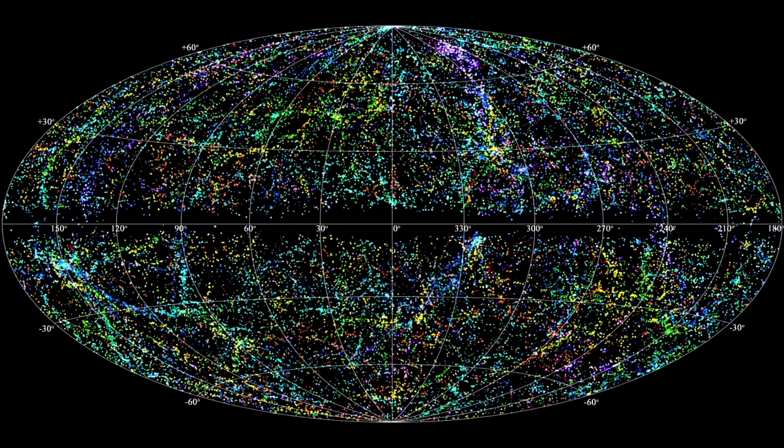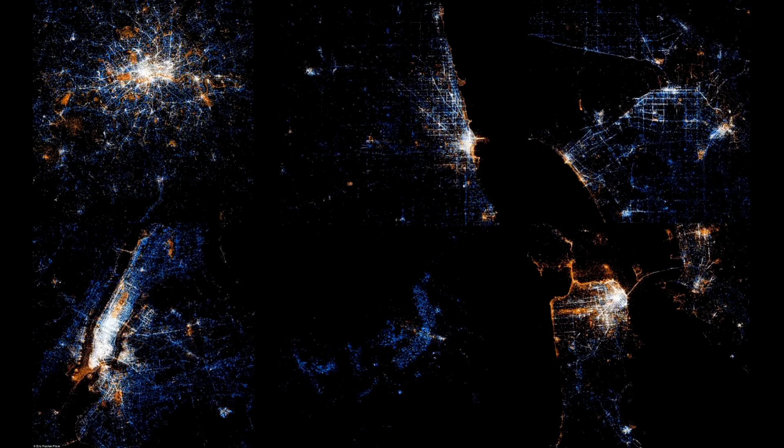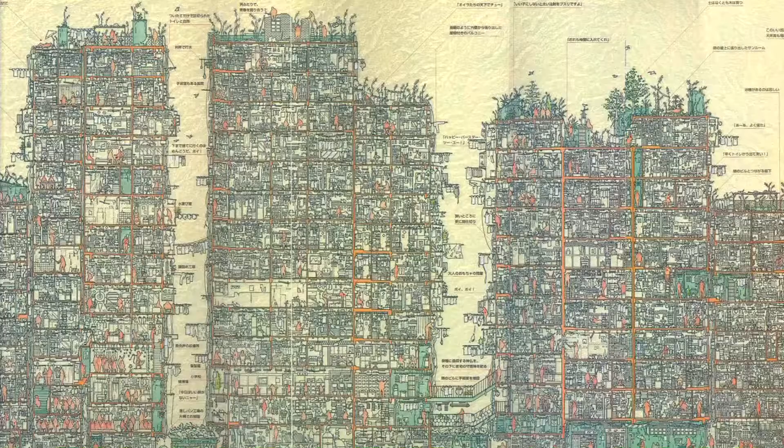And as I said, I believe very much in density intensification. This is an image of Kowloon Walled City, the most dense environment ever created by humankind. Most of us don't live at that kind of density. The 7 billion of us live in quite a scattered array across the planet in terms of how we use land. And in my book, I talk about the fact that if all 7 billion of us lived not at skyscraper density, but actually only about 3 or 4 story brownstone density, about 75 units to the hectare, all 7 billion of us could fit in the state of Texas in the United States.

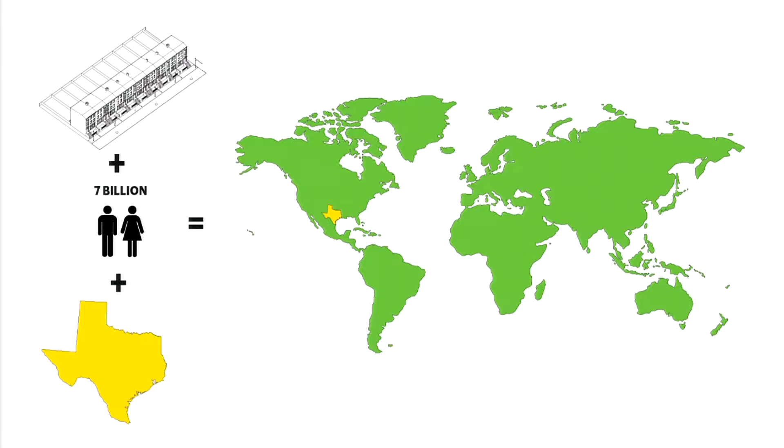Now, I'm stating that not to suggest that we all move to Texas and that we leave the rest of the world for agriculture and nature, but to actually say that how we live in terms of density, I think, will actually dictate the future of the world. And if we can live in a more dense way, we will certainly lower our carbon impact and create a better planet. But what I found in talking to people about that is that density or intensification, depending on how you talk about it, has a namelessness and a facelessness that scares people.

And as architects, we spent much of the 20th century struggling and debating over issues of style, became lost in that world, and really, I think, lost our way in terms of understanding the true beauty, and I will use this very dangerous word beauty, to talk about how beauty could actually, in the 21st and 22nd century, be a way in which people can embrace the complexity of the world, not deny it, not be reductive about it, but actually find a lens into it.

And I feel that in order to do that, we no longer need Superman. It is not about the architect as superhero, but in fact we need the Avengers. We need an extraordinary group of skills, men, women, people of all different orientations and races and skills, to try to give us that beauty, to give us that lens into the complexity. And in fact, it may not be about 4 or 5 Avengers, but an entire world of different skill sets where it's not just about architects and engineers and bureaucrats, but the biologist and the chef and the poet.

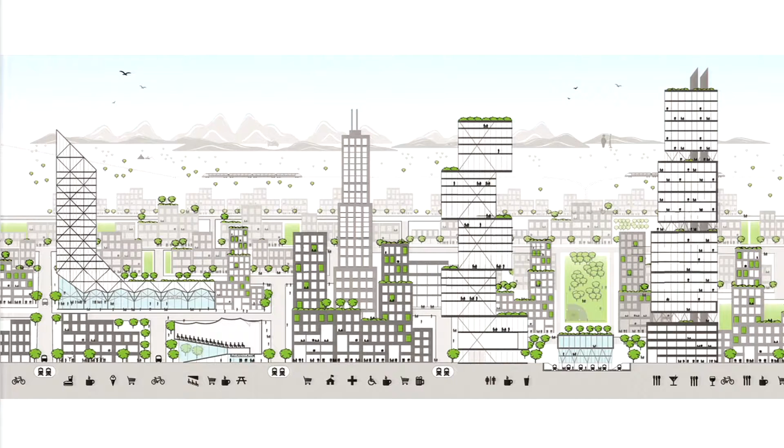And these are images from our studio, and this is very much what we try to build, where not everyone is an architect and people come from very, very diverse backgrounds and mindsets, all towards this idea of building a better city, of building a city that's inclusive, that's green, that's dense, that's transit-based, that's culturally based.

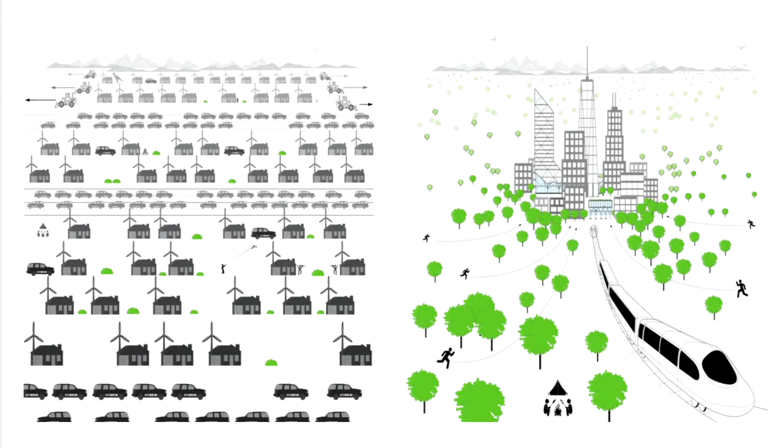So I believe from this you can extrapolate lessons. Lessons that we should not live out in this horizontal sprawl and try to use technology and windmills and solar panels to try to fix that very 20th century model on the left, but in fact use our cities to not only build densely, but to leave nature natural, to be able to access nature in a much more direct way directly outside of our cities, connected largely by train.

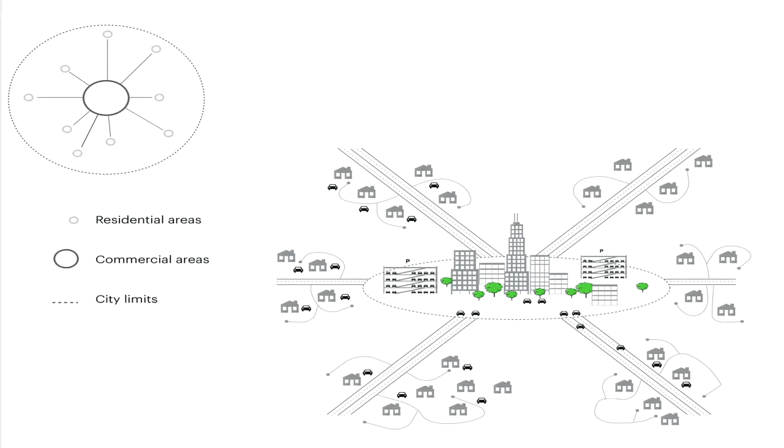At the same time, we understand that the hub and spoke model of our cities is actually changing. This idea that people live outside of our cities and commute into a central business district every day. This is changing very rapidly, and you saw it in all of the images that Dr. Ichikawa showed about all of these various cities, that we are moving into, especially because of technology, a networked city model, where throughout a big city, you can find an archipelago, a series of islands of places where people live, work, and play across many districts, and I think this is reflective of what London has been doing in terms of Eastern London.

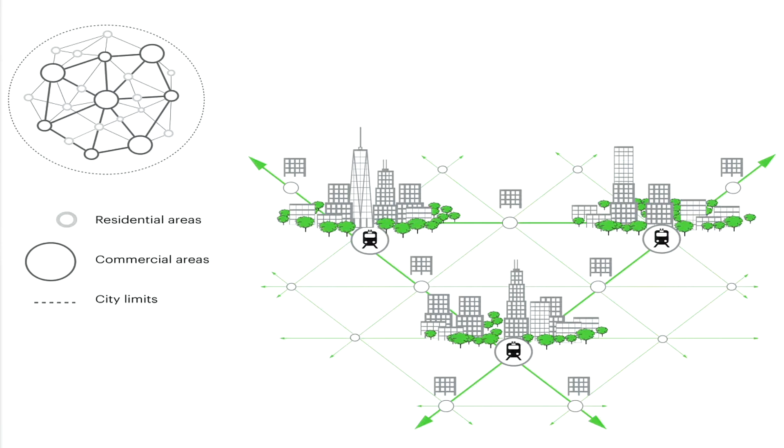So in New York, we have tried to build the Hudson Yards area. This is an extension of the existing subway line, the expansion of the High Line Park, which just opened 2 weeks ago into its third phase into Hudson Yards. This is under construction. This is some 4 million square meters of new city that's being developed as a mixed-use place built around a series of parks by the west side of Manhattan.

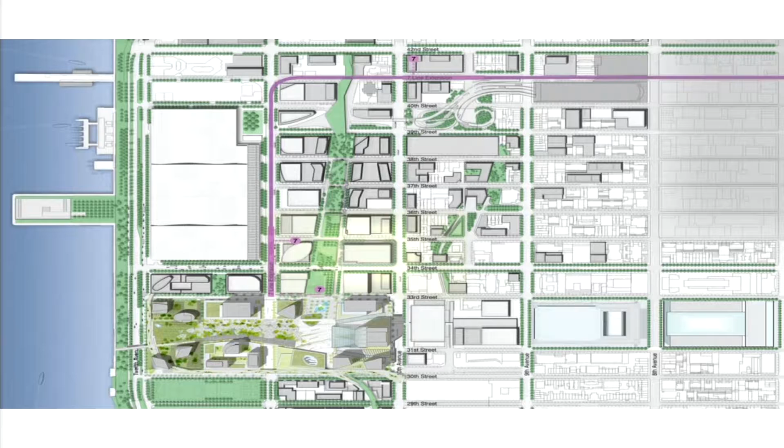But what you understand is as you try to build cities of that complexity, of that size, and with those kinds of ambitions, that the bureaucracy can be overwhelming, and that one needs, again, that interdisciplinary approach to deal with what is a very complex regulatory structure that every single city has today.

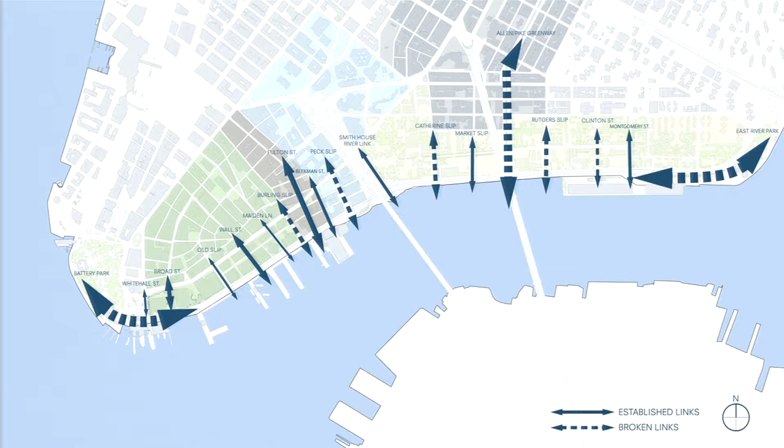We, in many ways, started this kind of work in Lower Manhattan after the events of 9/11. Where we had to rediscover our waterfront as a means of bringing more amenity to Lower Manhattan in the aftermath of the tragedy of 9/11. And much of this was discontinuous. It was hard to access. There was a highway between where one needed to get from the city out to the water.

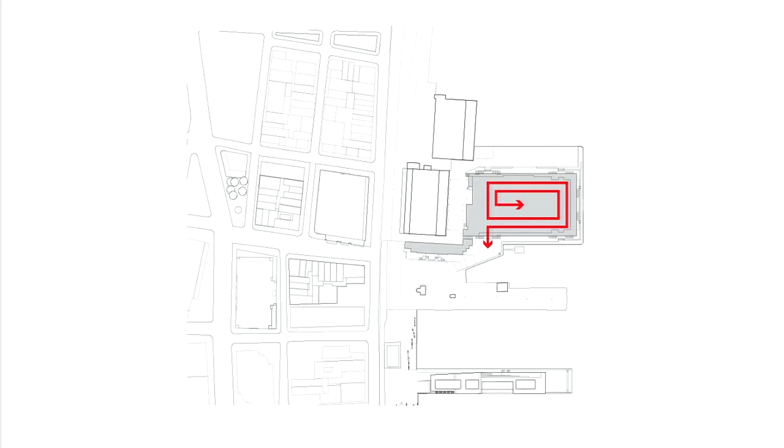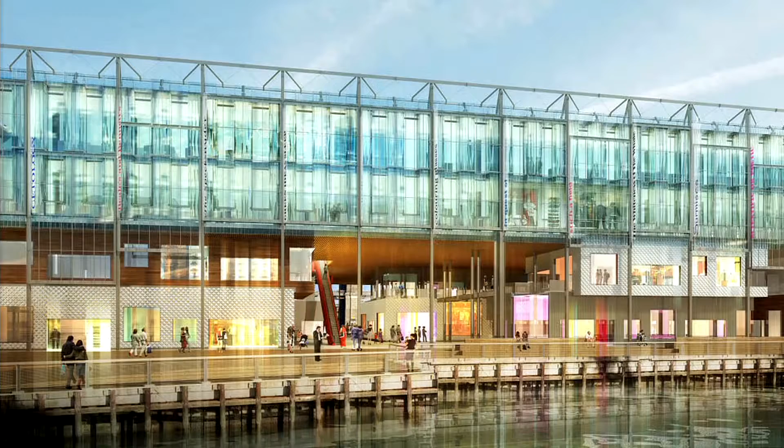And then these are these images quickly of the waterfront that we built along Lower Manhattan, including a new pier that's really quite beautiful, very public, not very large in size, fairly low budget, with public space at both levels. And then next to it, an old shopping mall that's also changing and moving away from the old internal idea of shopping where everyone is trapped kind of in a place, and instead breaking it down and again using this beautiful glass shutter system to open up during nice weather. And always opening and embracing the complexity of the city, not trying to enclose and control the city.

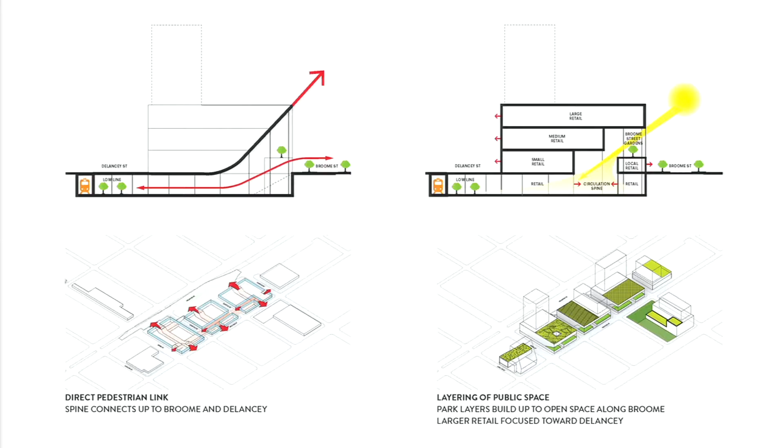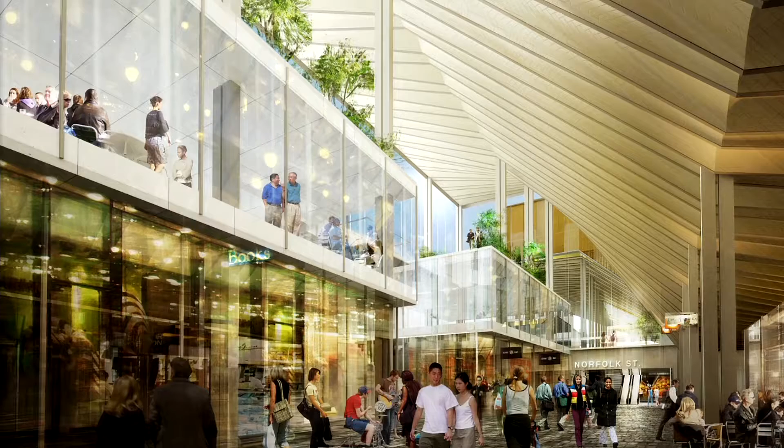This is Essex Crossing or Seward Park, which Professor Ichikawa mentioned, a large housing project including much social housing, a senior housing project connected to the subway. And this is an initial sketch that again talks about how do we bring a set of complexities into the section of the city, also how do we bring light and air into the city and down into the subway and this new market. So this is work for the city in terms of that big light scoop, bringing light down into the subway level with new food and retail experiences there.

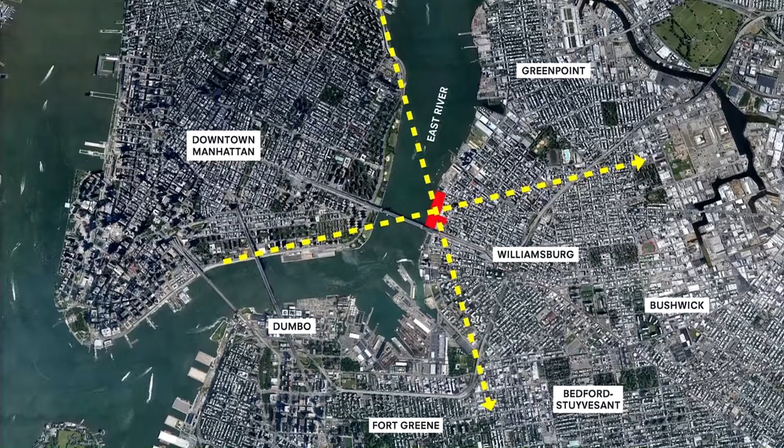Or across the river, the Domino Project. I was very interested in what Professor Ichikawa showed in terms of the 5 kilometers and the 10 kilometers. We're really rediscovering the area in that 10-kilometer belt outside of Manhattan. And this is part of a new waterfront for Brooklyn. This was the previously approved plan for this. This is 3 million square feet or 300,000 square meters of new development, all centered on a heritage building, an old factory called the Domino Sugar Plant.

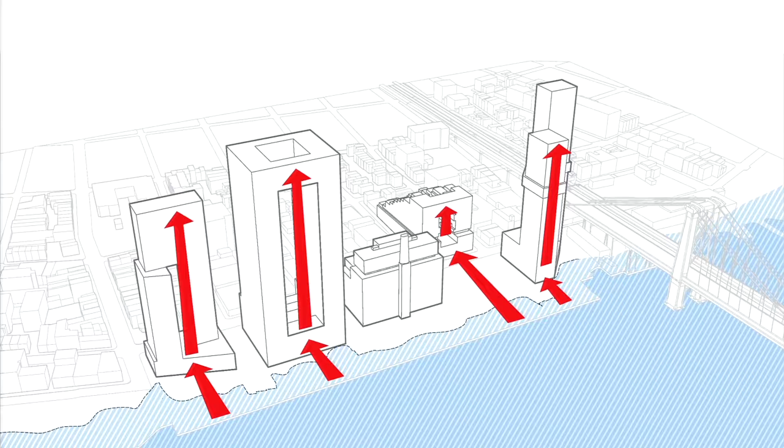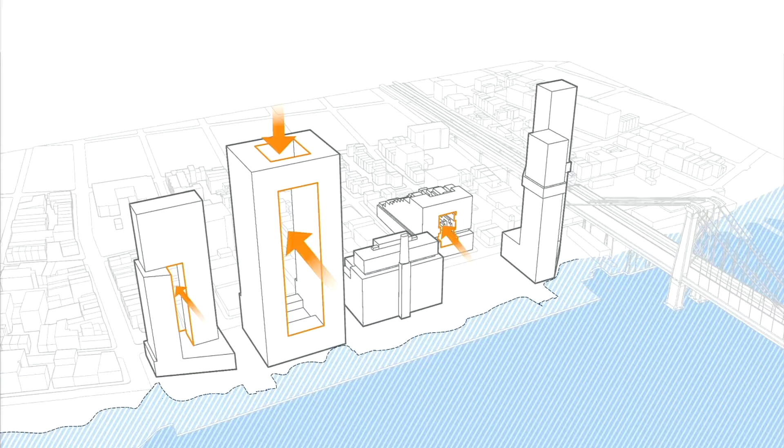And we actually proposed to the city that the buildings go higher to get them out of the floodplain, and also to build about 6.6 acres of new parkland along the waterfront, and also to aerate the building. So every building in the master plan has an aperture in it to bring light and air. It's not to end the axis at La Défense or to make a big iconic statement like CCTV, but in fact a very performative function of bringing light and air back to the neighborhood.

And we tried very carefully to move and interpret the complexity of the city in terms of the lower scale of this neighborhood, the kind of scale of the bridge and the factory, and then the scale of the skyline. And so this master plan was approved with taller buildings, but again, a quite glorious park, and the factory in the middle. And what's important about this is not just housing. This is housing and office space, independent retailers, a school, a community center. It's really about building neighborhood.

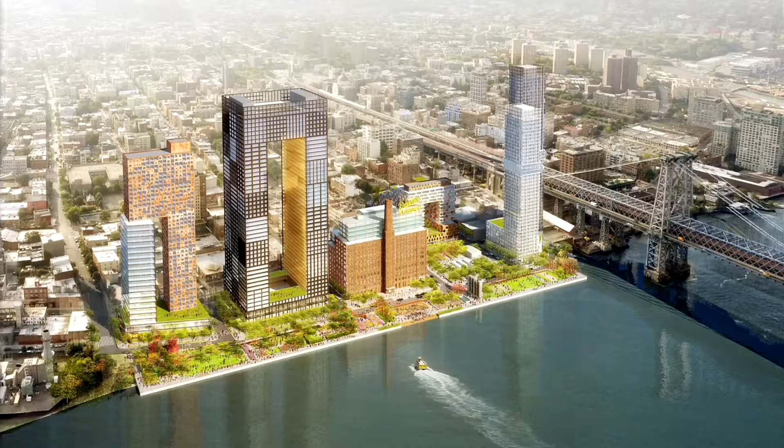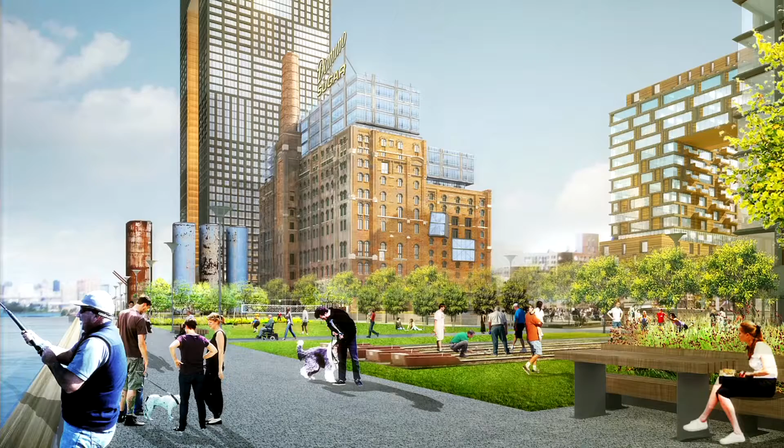And how these buildings meet the street is critically important in terms of building that neighborhood, with a very heavy emphasis on bicycling and walking. So it's not even about using the subway to reach Manhattan, but again, kind of its own node within the larger network of the city, and a way of identifying the place using the old industrial artifacts. And this, again, will be a technology hub.

We at Columbia did a study that said that 85% of our new technology jobs are in heritage buildings, are in pre-war buildings, because those people don't actually want to be in tall towers. They want to be in a different kind of work environment. And so this is something we're very much trying to build in New York. And we're also trying to emphasize a new skyline in Brooklyn. Brooklyn is sort of the next chapter in New York's history, if you will.

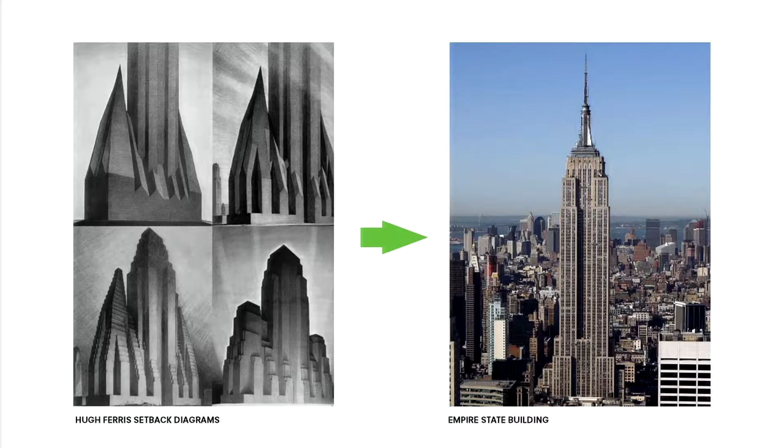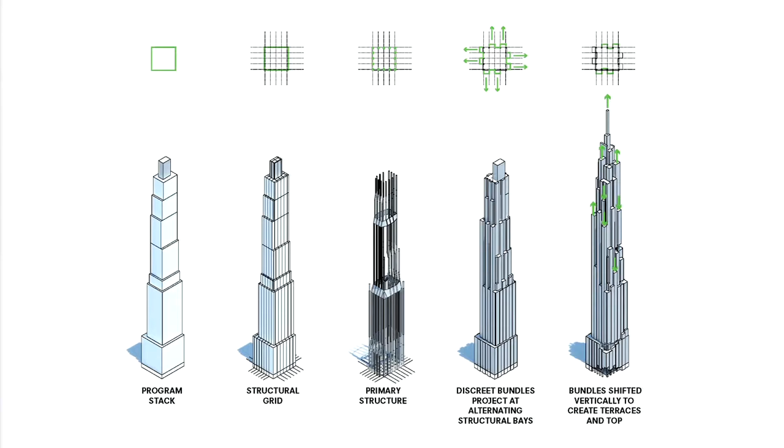We're also starting to understand, well, what does it mean to build a responsible tower? What does it mean to build a tower that's really part of our city? And we've looked to some of the great towers of New York to understand this, that it's not just building out efficiently the program of the tower, but using the structure and then layering on elements that actually give it a much greater depth and complexity. And so this is a kind of diagram of what we're trying to build in terms of our work with towers. This is on 57th Street, a kind of super luxury project next to a heritage site, the Steinway building.

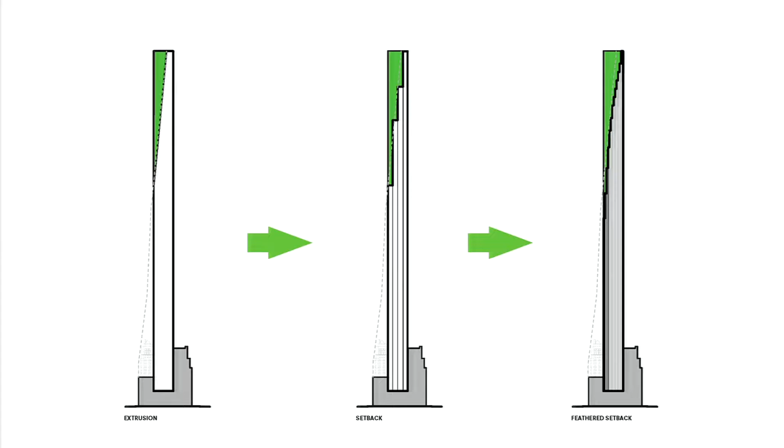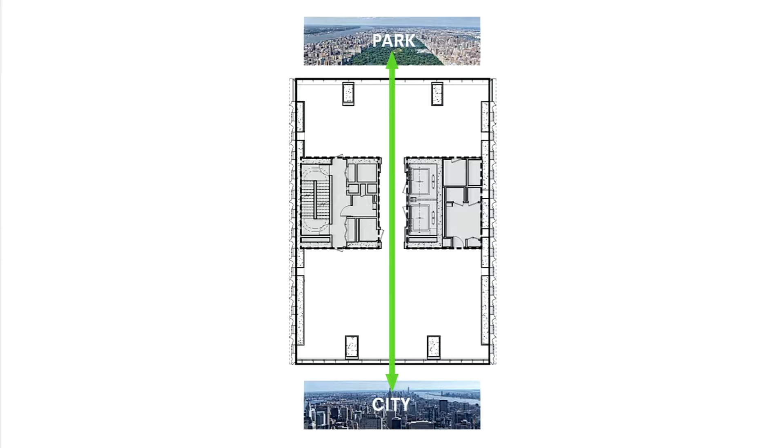And this shows how we're trying to use the form of this. This is a tower that will be 1,400 feet tall, and actually will have views through to both the park and the city in terms of its served and servant relationships. This is an aspect ratio of 1 to 23, so the east and west facades are almost all sheer wall with open expanses to the north and to the south. But again, we were very focused on the materiality and understanding what is both great about old New York and new New York, and worked with the facade.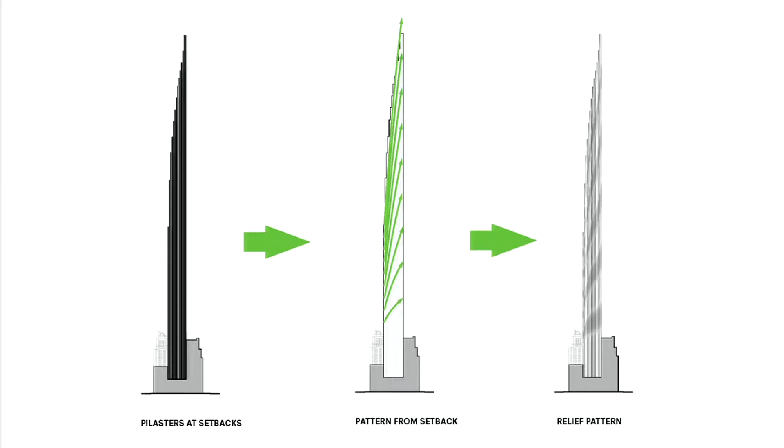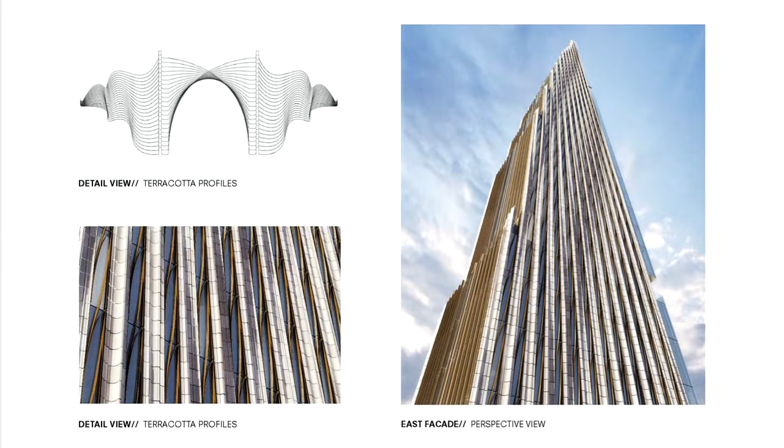This is a terracotta facade. It's a built-up facade to create a kind of complexity on the oblique. So when one sees it from the side, you'll see this dance of light and shadow. And you see this terracotta and bronze facade. But this is a historic material used in a 21st century way. Only computers can create these terracotta profiles. And so you see that this is quite an elaborate structure that warps and wefts as it moves up the side of the building.

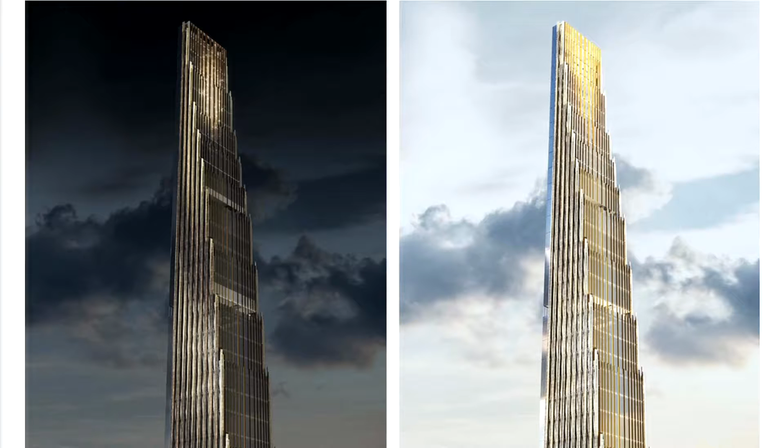But to me, the most important thing is how that new building relates to the mass of the city and grounds it in New York. This is a tower that could not be in Dubai or Shanghai or Mumbai. It is of, by, and for New York City. With an elaborate top that, again, is meant to be expressive, not just a flat top with light coming through it, with a great responsibility in terms of being worthy of New York's skyline.

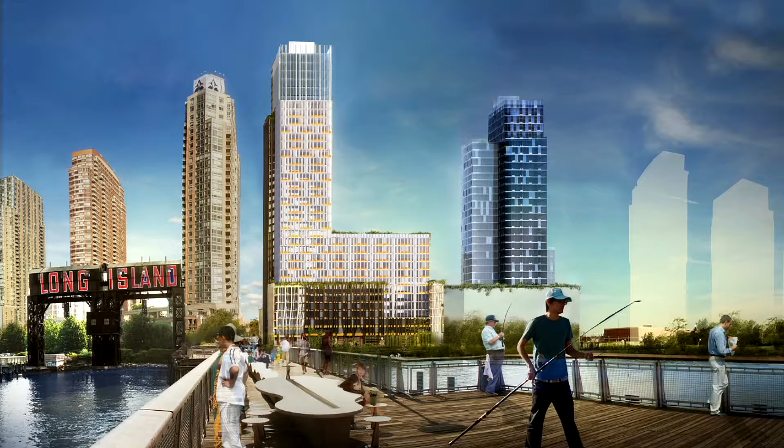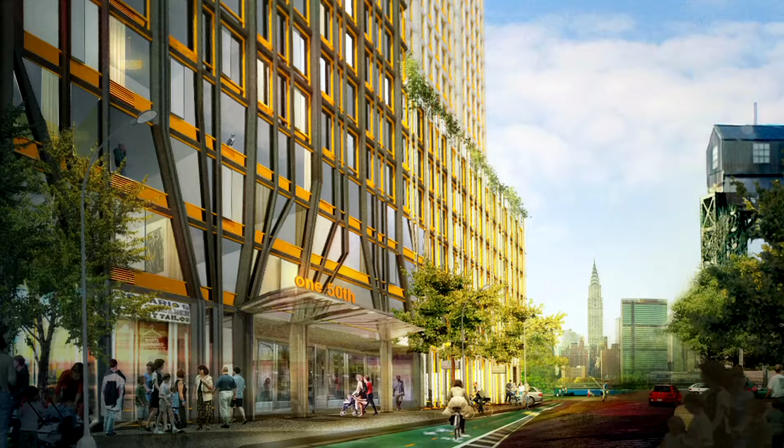So if that's a super luxury project, this is Hunters Point South in Queens. This is a completely affordable housing project. It's 100% social housing, again, with a school and a park near it. This was a city competition. Again, you see a lot of emphasis on bicycling and how people move around this complex. Very difficult in terms of budget and getting architecture to simple things like the use of color, very important.

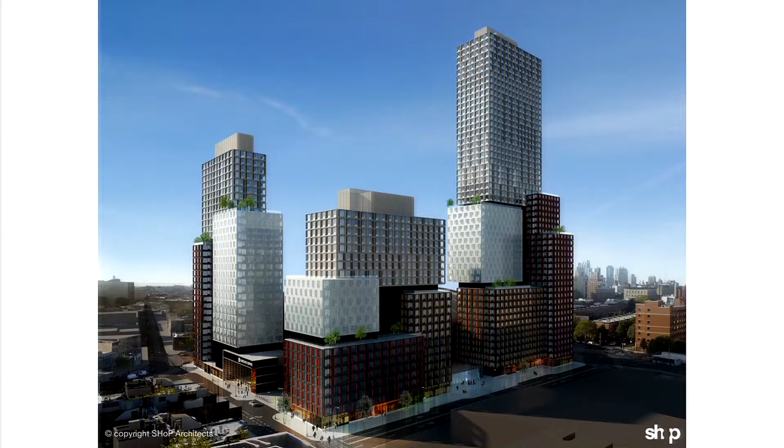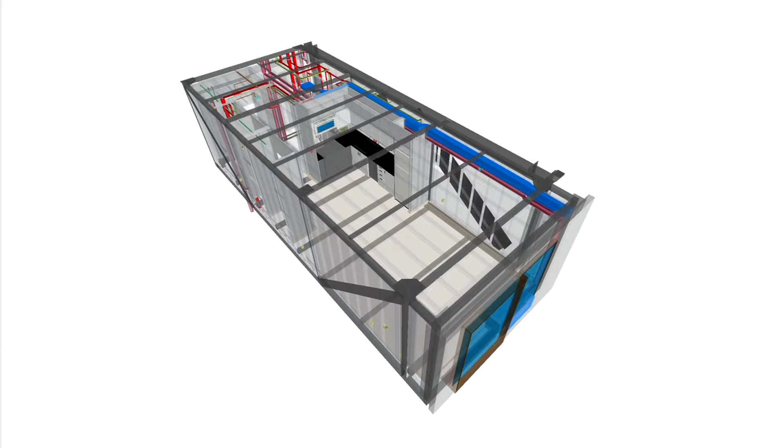Or in Atlantic Yards, this is one of our great experiments. This is going to be the tallest modular housing project in the world. It's about 37 stories, so this is prefabricated housing, again, affordable housing, that rises about 37 stories. This is a structural steel frame, and then these modules are built in a nearby factory by union labor. Arup was the engineer and has the patent on the connections for these modules that are carried by truck to the site.

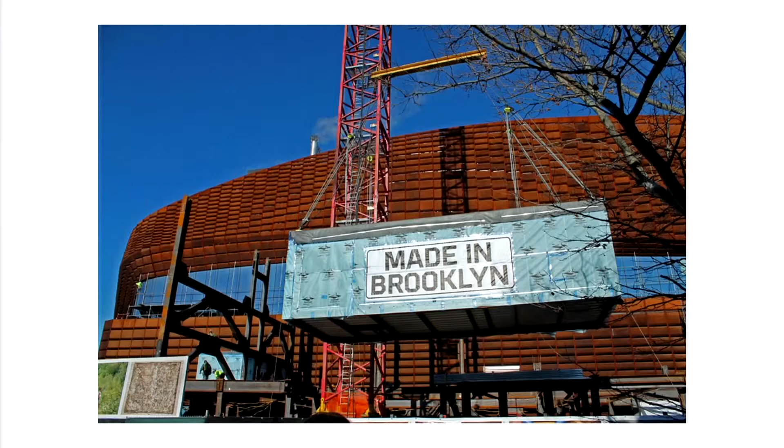It's still very high quality housing. In fact, I would argue it's better quality, and when you're in it, you'll never know you're in a modular housing project. It will feel very normal. But we believe that these modules, and that's the first module going in place, which is, again, part of the new economy of New York City, this maker economy of building things right in New York. But this is under construction right now, and we're very excited about it because we believe it can lower construction costs for affordable housing by 20 to 25%.

This is directly adjacent to the Barclays Center. This is the project I'm going to sort of leave you with. This is completed. It's a 20,000 seat arena that's the first arena in the United States that has no parking associated with it. There's not one single car parking space. It sits on top of 11 subway lines that all converge.

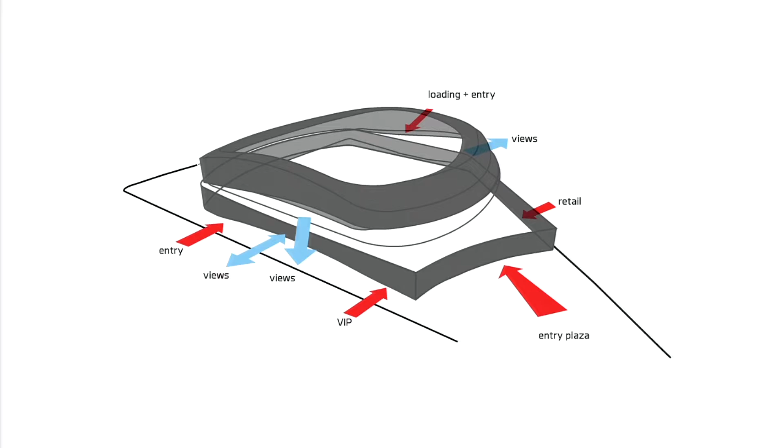And the whole idea was to take that standard form of a sports arena, which usually is a black box. It usually closes itself to the city. But instead, it uses this kind of double helix to open itself out to the city, both at the ground level and then in the upper concourses of the building. And then there's this very exuberant moment, this very important moment, where it comes out and meets where the transit connection is, in something that we call the oculus.

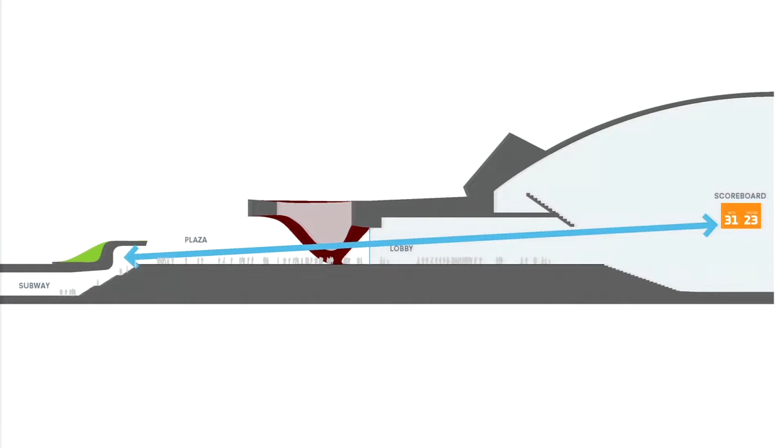And so the idea is that when people come through this new subway, and the developer paid about $50 million for this subway extension, people will come out into this plaza and they will immediately see daylight. They will also very immediately see the scoreboard, because people, of course, if they're late to the game, they want to understand, what's the score?

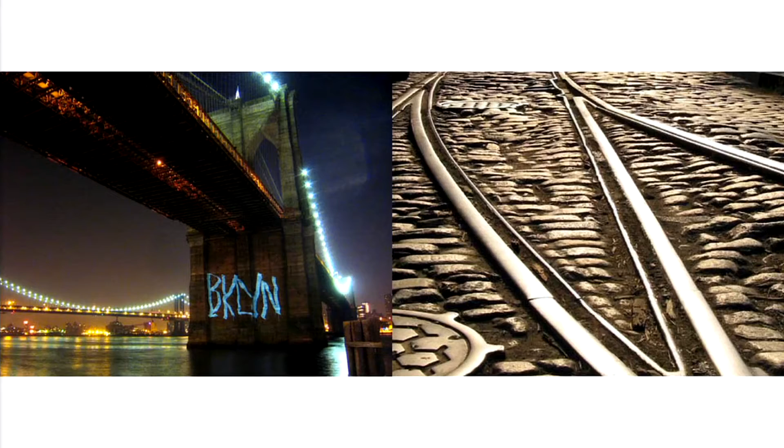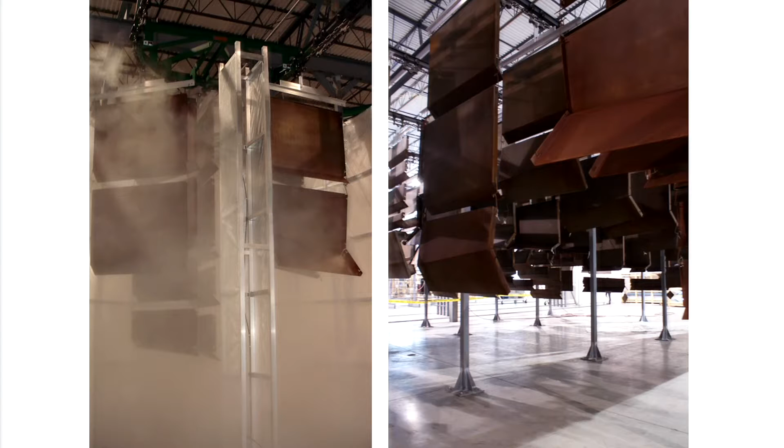And this is actually the way this was fabricated. So it is designed on the computer, and it goes directly to the metal fabricator. There's no middleman in between. And this is why this building, which actually had quite a low budget for this kind of building, was able to have this kind of exuberance.

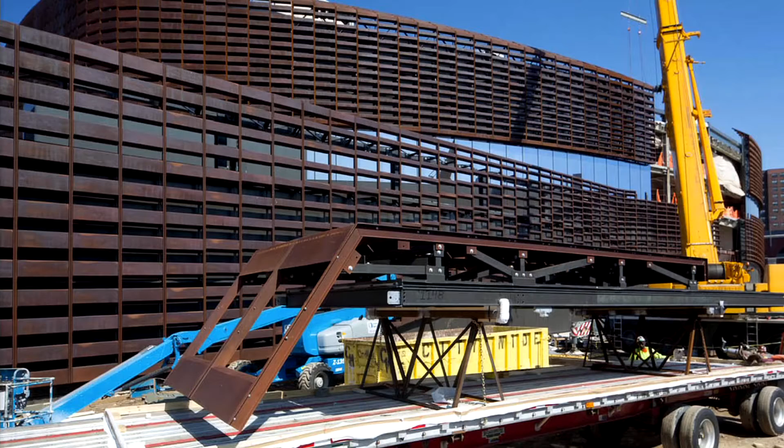We actually designed a software program so that you could track every single piece of the Cor-Ten steel as it arrived on the site. And so this is 12,000 different curved panels in this rain screen that came by truck, sat on these mega panels, and was constructed into a skin that is very much the color of downtown Brooklyn, but then at night becomes something very different and becomes quite luminous.

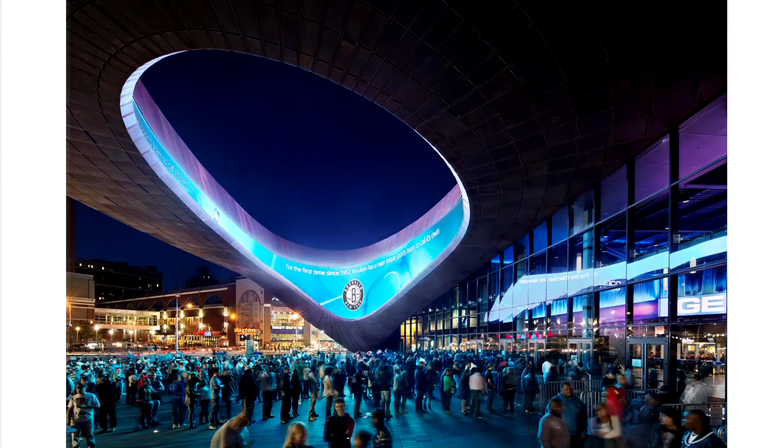But to me, what's important about this kind of city building is that it is part of the city and integrates into the city in terms of new and old, high and low, and that this is something that's very important if we're going to talk about intensification, that people need to feel the texture and the kind of delight of a place like this. And this is the plaza. This is the last slide of my presentation.

And I always end with this because, to me, this is about how a building in a city becomes more than itself. That its plaza, how it relates to mass transit, how it relates to the neighborhoods around it, creates a sense of civic delight. And perhaps in the complexity of our times, gives us a window in terms of how we think about the world in which we live.